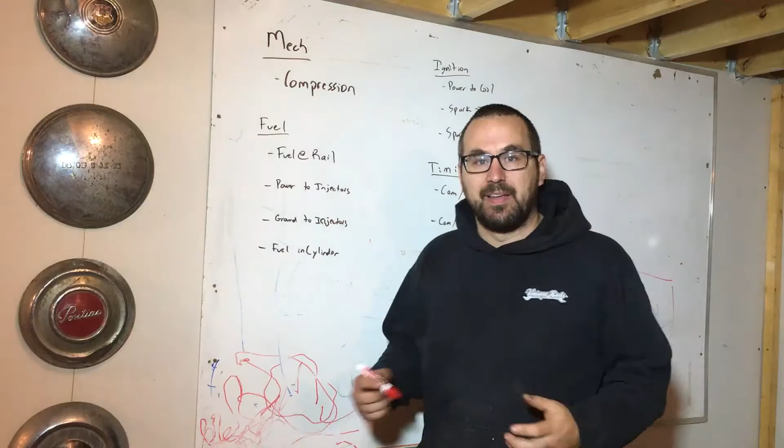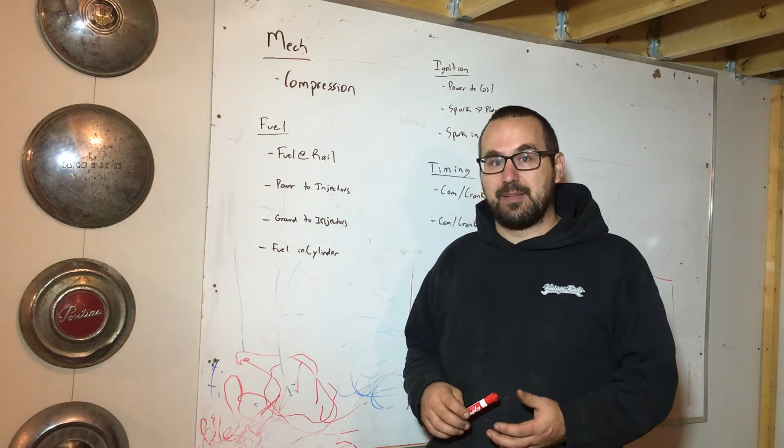It's been about 4 months that I've been trying to get this car started, and it's been kicking my butt and consuming a whole bunch of time, and unfortunately I've been running into a wall. So in this video I'm going to walk you guys through everything I've checked and how I've checked it. I'm going to cut in footage of each test so you guys can see and validate that everything is good. But here's what I started out with.

Basic principles for an engine to fire: it needs fuel, air, and spark. Then it gets compressed and an explosion happens, and good things happen, right? So starting with the most basic thing, I did a compression test.

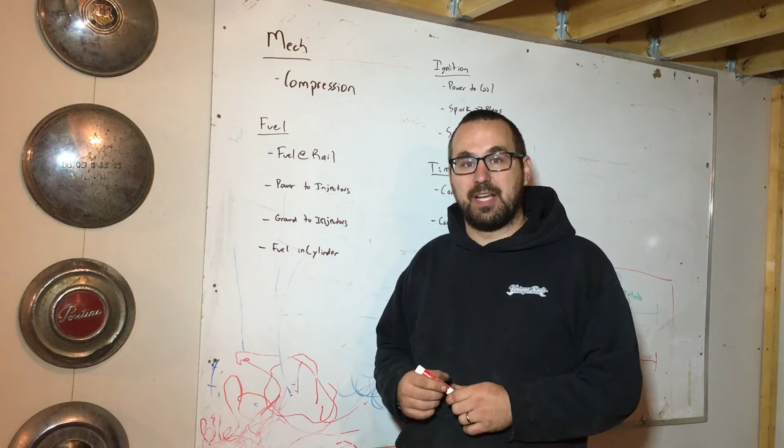In cylinder 1, I've got the normal spark plug still down in the hole, and the compression tester screwed into the second spark plug hole. I'll crank it now and we should be able to watch this spin up. You can see it's up just over 150 psi, which is pretty good.

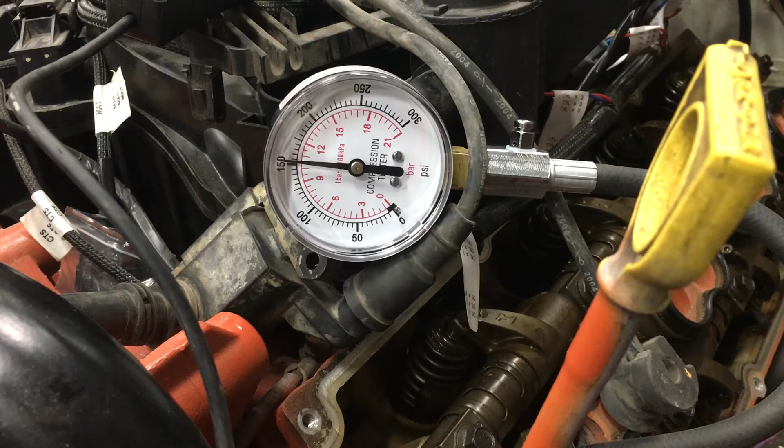So I did a compression test, and I had about 150 psi in all cylinders, which is plenty, and they're all within about 5 to 7 psi variability amongst the 8 cylinders. So that tells me I don't think I have a compression issue. The next thing I checked was going through the fuel system.

I validated that I have fuel at the rail, and it's pretty easy because I have an external fuel pressure regulator with a gauge on it, which tells me I've got 58 psi of fuel at the rail, which is what the injectors are calibrated for and what the Holley ECU is set up for. So that should be good.

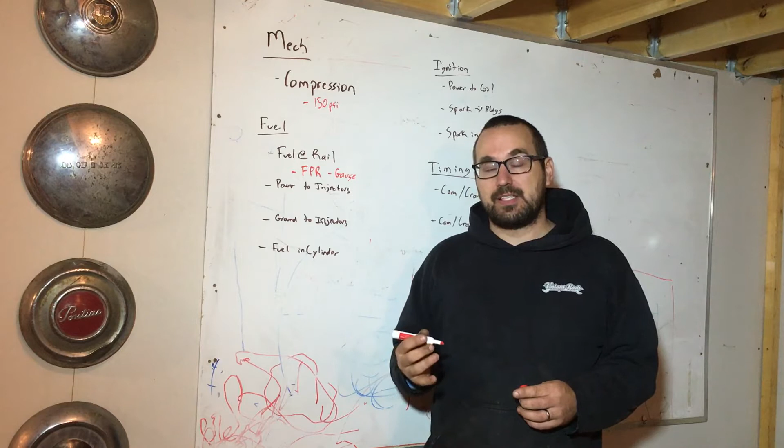There are 2 wires that go to each injector, power and ground. With this Holley EFI system, it's constant power to each injector, and then it pulses the ground to tell the injector when to fire. I used an idiot light on the injectors and validated that they have power, and the same for the ground - I was able to tie into the ground system on the way back to the ECU and validate that it has power going through it. So I don't think that's the concern.

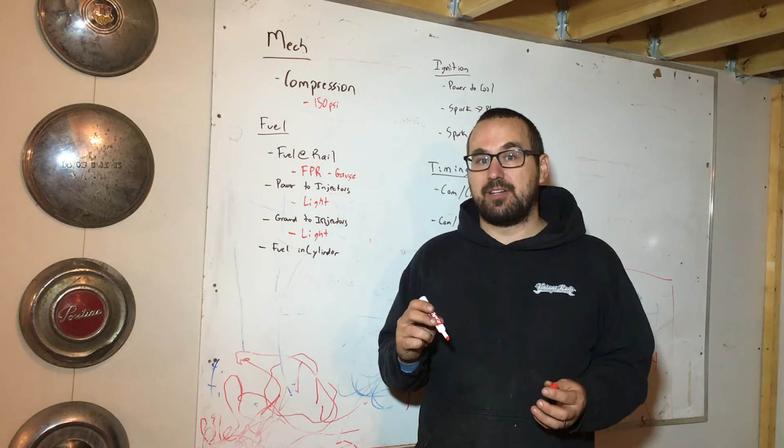The last item here is fuel in the cylinder. Honestly, at this point I don't have a really good way of trying to validate that. I can't figure out a way to fire the injector off to the side. Now, I have removed an injector and validated that as you hook up power, you can hear the click, click, click you're supposed to hear in an injector as it does its pulsing. But maybe because the injector sat there for so long, they're not functioning correctly. So new injectors are on order - we'll see if that helps.

After that, I worked my way through the ignition system. I looked at power to the coil. There are 8 coil packs on this engine, and they each have a waste spark setup which ties into a cylinder on the opposing bank. It was easy to validate that there's power to each coil, once again using the light, and then validating that there's spark going to each plug.

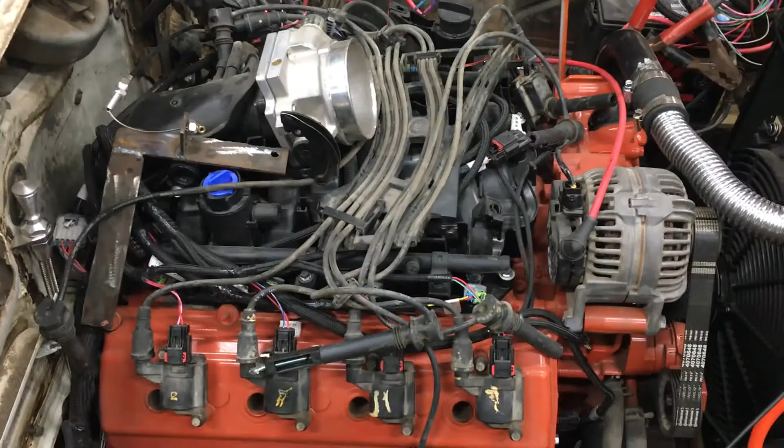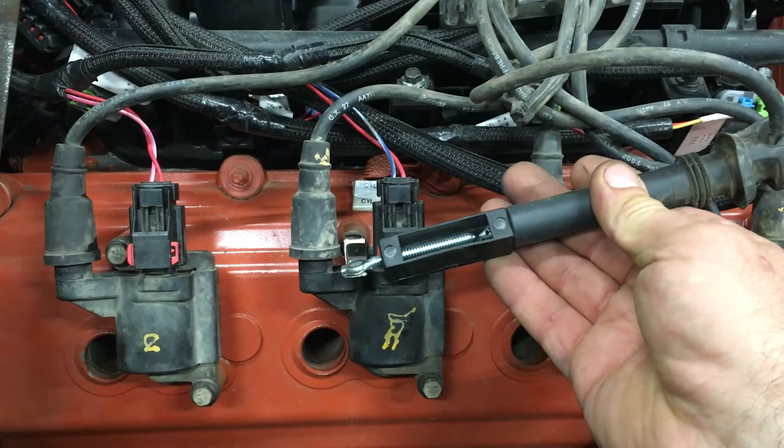What I've got set up now is the waste spark wire that goes from coil pack 1 over there all the way across to cylinder 6. I've got the boot from it tied into this basic spark tester and grounded, so as the engine spins over we should be able to see spark happening in here - and if spark is there, there's spark happening at cylinder 1 as well because it's coming from the same coil pack. Same design as this: this integrated boot design goes down into the main cylinder, but it has this little branch into this mess of spaghetti wires that goes across to fire that opposing cylinder. So I'm going to go spin it over, and you should be able to see spark happening.

And validated that that is good. So I checked power with the light, and I checked spark to the plugs with the tester. But in terms of validating that there's spark in each cylinder, there's not really a good way for me to check that.

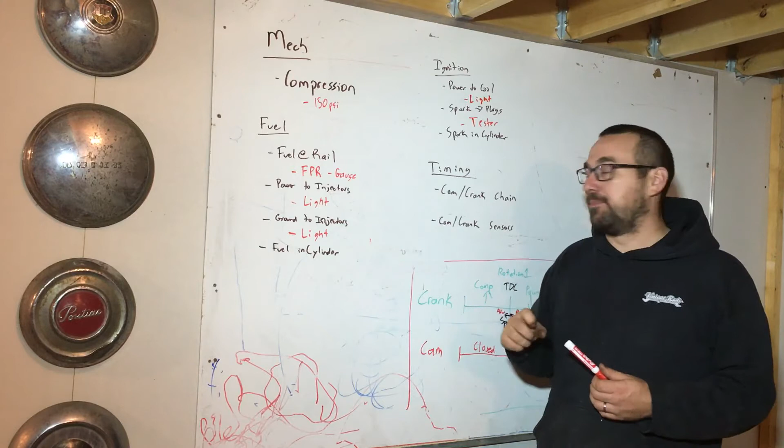But if you have fuel and spark and your compression is good, the only thing that could be messing with you is just the timing, how everything is linked. So first off, mechanically, if the compression test passed, this should be good, but the cam to the crank are connected via a chain.

And when you're assembling an engine, it's very important to get those correctly oriented to each other when you do that first assembly. But this engine came out of a running vehicle, and it has never been taken apart, so that should not be an issue for me.

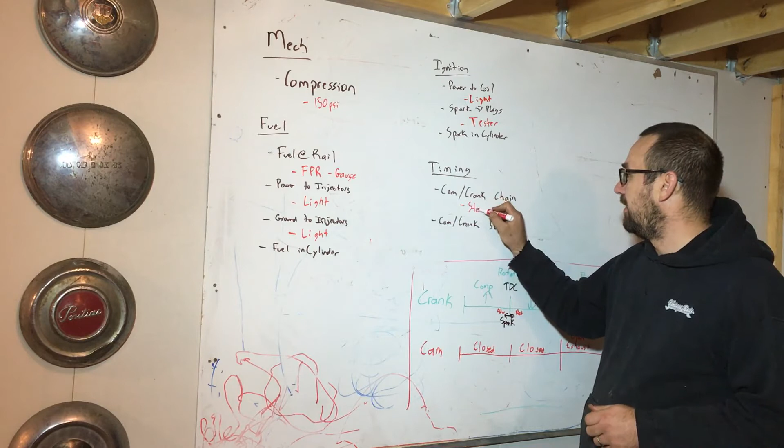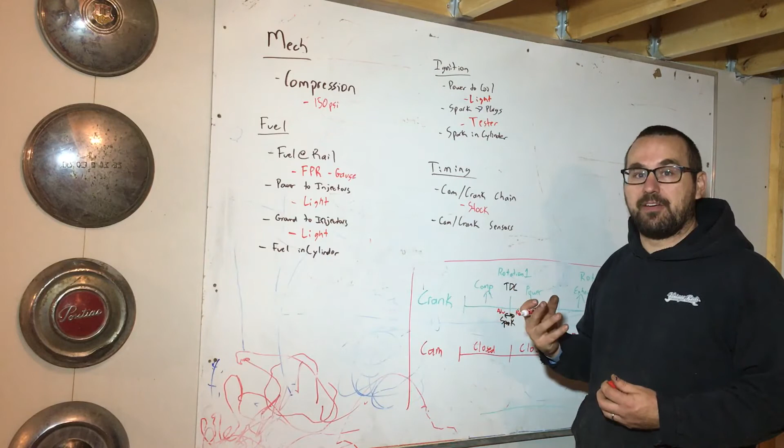I didn't take it apart. I have not disassembled the front end of the engine, but when I do my checks for top dead center, I would have the engine open from the valve cover side, and you can see that the valves are closed when they're supposed to be and open when they're supposed to be. So if it's off by a tooth, and there's 36 teeth on there, it'd be off by not very much.

It'd be off by a few degrees in terms of the valves to the piston. You can't detect that by eye, but I'm kind of relying on the fact that it is the stock assembly and it came out of a running vehicle. It hasn't been touched, so it should be in okay shape.

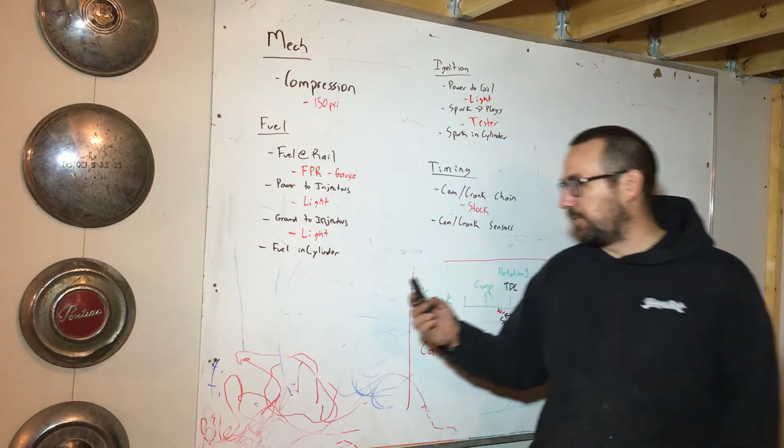And then the cam and the crank sensors. So on the Hemi, we'll start with the crank sensor. It's just a proximity sensor. The wheel that's on the crank is a 36-toothed wheel with a gap in it. And what this does is, as the gap goes by this proximity sensor, it detects that gap and uses that to orient itself to know where top dead center is on the crankshaft.

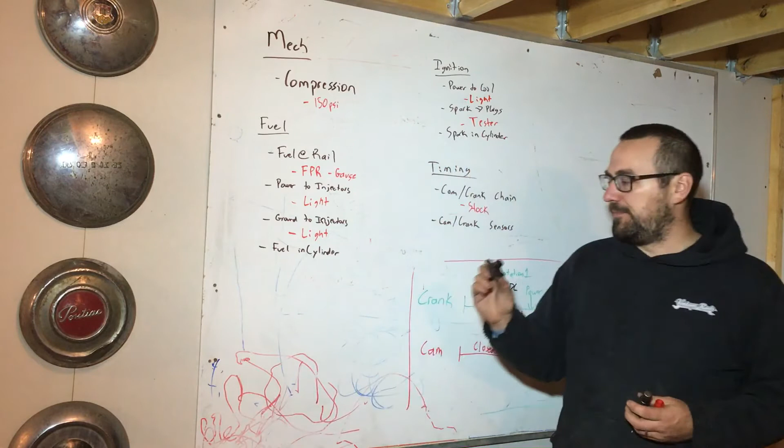And then it has a similar one that is in the camshaft so that it knows where it is as well.

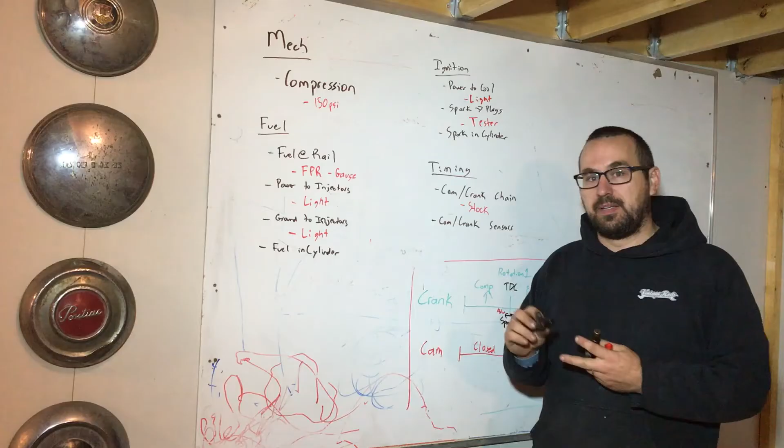So when you start digging into how the timing works in detail, I've got a little diagram here I'll walk you guys through to show you what I've been thinking. This is my basic understanding of how it all works. So for the crank to go through one full cycle of a 4-stroke engine, it does 2 full revolutions.

So in revolution 1, the piston comes up for compression. That's called top dead center. Spark happens at that point, and you can either advance or retard the spark based on how you set up your ignition system. Once that spark happens, the power stroke happens. The explosion pushes the crank back down, so that's completed 1 full revolution there.

Then in revolution 2, when the piston comes back up, the exhaust valve is open and pushes all the exhaust out. Then exhaust valve closes, intake valve opens. So in the intake stroke, piston comes down, draws a vacuum, fills the combustion chamber full of all that fuel-rich air from the intake manifold, and then it goes back to the start.

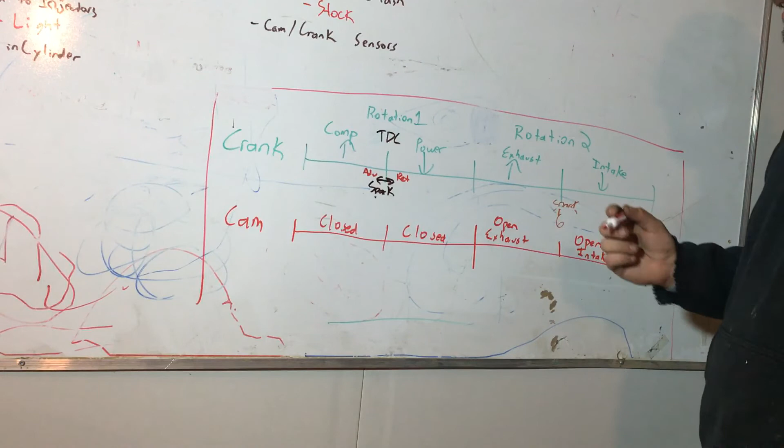So the cam only does 1 rotation to every 2 rotations of the crank, just with the way it's all linked and the way that the valve system works. So fairly basic. And what I think is kind of interesting is on this engine that I have, it has that waste spark setup like I mentioned before.

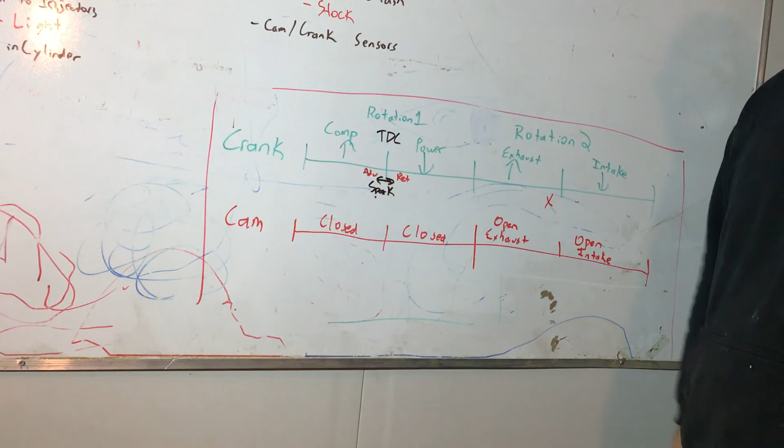So spark plug 1 from coil 1 fires right around top dead center at the beginning there. But spark plug number 6 from coil 6, through the waste spark setup, fires a waste spark into this cylinder number 1 in the exhaust stroke way over here on rotation 2. So it's kind of interesting, and that's why Hemis have 2 spark plugs per cylinder. It's not that they're both firing during the power stroke to generate the power stroke. In this waste spark setup, one's actually firing way over here.